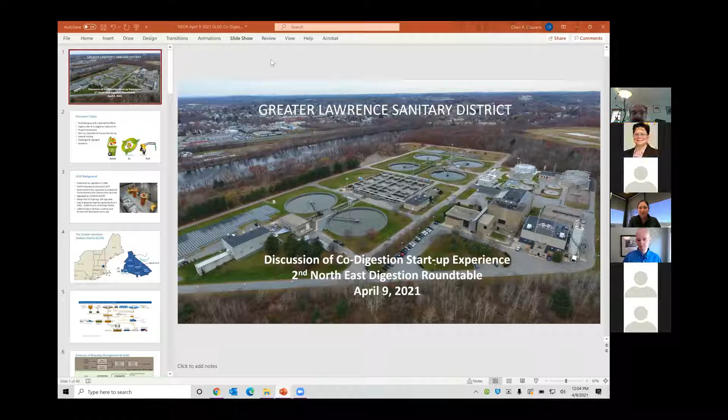All right, Janine, thank you so much for the introduction. I also want to let everyone know that Ben Mosier, who was integral with this Organics to Energy Project, is also with us today. He's the VP and manager of the Northeast group for CDM Smith. So Ben, thank you for being here today as well.

This is just an aerial shot of the Greater Lawrence Sanitary District, which I think is a pretty plant. I don't know if everyone else thinks that, but.

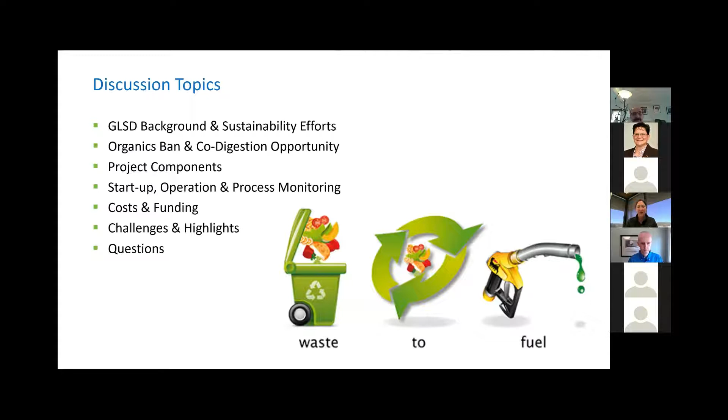So today I'd like to discuss a few items with everyone, including just the background on GLSD so you can get a feel for the type of plant that we have. And then I'll get into the organics ban and why we actually embarked on a co-digestion project, which we call Organics to Energy. We'll go over the components of the project, some startup data, what we're monitoring for different lab tests, the costs and funding, and then just highlight some of the challenges and benefits of the project, and then open it up for some Q&A.

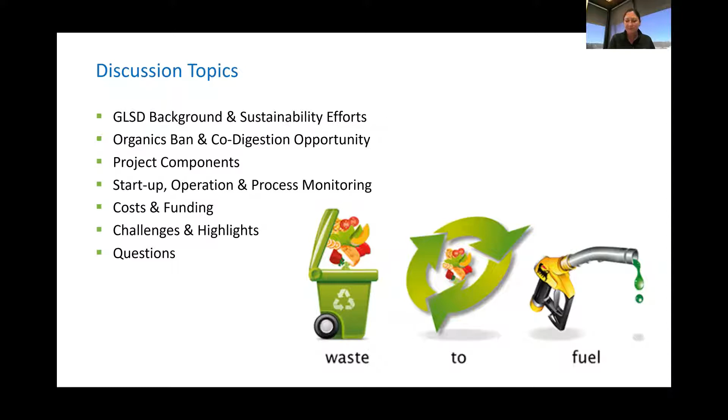So a little background about GLSD, and the picture on the right is our pumping station, which is about a half mile from the main plant. And I always find this interesting to show off: we have two 1250 horsepower motors and two 800. This is a little bit of a dated photo, we've added eddy current clutches to the two smaller pumps, but we have some really big pumps that bring the flow to our main treatment plant in North Andover.

We were formed by legislation through the state in 1968. We've been operational since 1977. And just as other districts are governed, we have a board of commissioners that represent the communities we serve, and depending on the population of the community, they have 1 up to 4 commissioners at this time, but for every 20,000 additional population, they have another representative on the board.

We are regulated by the federal and state government, just as every other treatment plant is. As Janine mentioned, we're a 52 MGD plant, and our peak wet weather flow capacity is a little over 135 now, but we're leaving it at that for now.

And one other item that makes us special, I guess you could say, similar to what Deer Island does, is we have an on-site heat drying facility that was built in 2002 in conjunction with our digestion facility, and we produce a little over 5,000 tons per year of a fertilizer pellet. John Kopek from Synagro is also on the line, so I'm glad to have you here too. 100% of our pellets are considered Class A, exceptional quality, and sold to local farmers and landscapers.

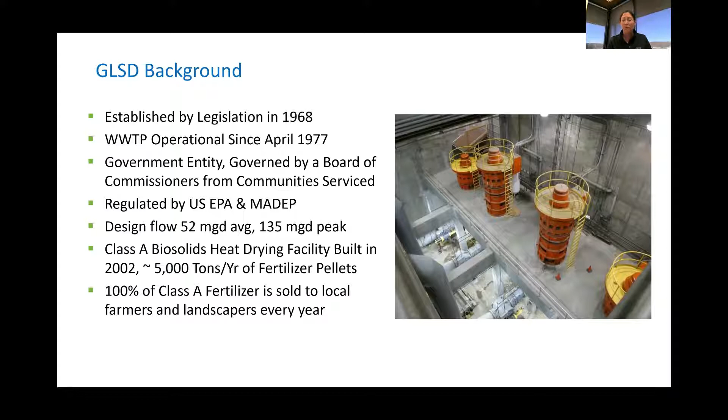So just to show you where we are, in case people aren't familiar, we're located in North Andover, as the star indicates, and we service the cities of Lawrence and Methuen, as well as the towns of North Andover, where we are, Andover, the eastern part of Dracut—the western part goes to the Lowell plant—and all of Salem, New Hampshire.

And you can see the Merrimack River goes right through our service area, and that's where we discharge our final effluent. So here's a fairly new process flow diagram that was put together.

We're a typical treatment plant in many ways. Like I mentioned, we have our off-site pumping station. We're a little bit backwards in a way, but it seems to work—we actually do grit removal before screenings. Then we have circular primary clarifiers.

We've had many iterations of different methodologies here, but as it stands right now we have an anoxic selector, fine bubble aeration, final clarifiers, disinfection and dechlorination with sodium hypochlorite and sodium bisulfite.

The solids off of the primary clarifier, as well as the waste activated sludges and the food waste, all go to different thickening processes, except for the food waste actually—the food waste goes in directly to the blend tank, to the digesters.

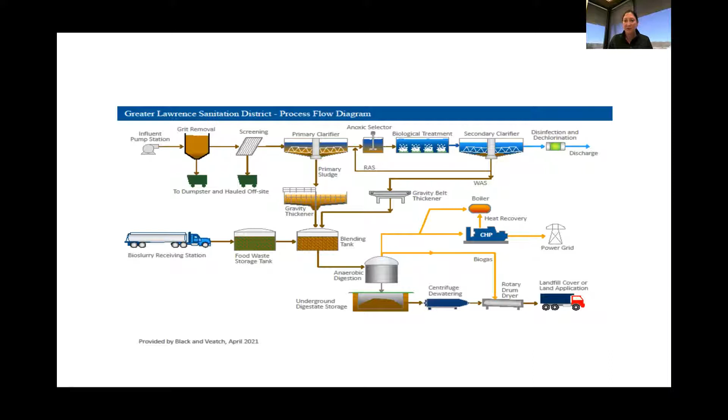I just wanted to touch on this for a second because we've had an evolution here with how GLSD handles biosolids, and I thought it was worth mentioning. So when we went online in '77, we took the waste activated sludge and primary sludge, thickened it, and went right to the incinerator on site. That was very convenient, I guess you could say. That didn't last for too long.

Then we took the mix of waste activated sludge and primary sludges, went through gravity thickening still. And at that point we would decide: do we want to just go with liquid offsite disposal, or go through the belt filter press and produce a cake? Again, this is all landfill.

It was during this time that GLSD realized this is not a sustainable model. We had trouble finding landfills that would accept the amount of biosolids we were producing, and the costs were extremely volatile.

And that was the impetus for GLSD to embark on the Anaerobic Digestion project, which went online in the early 2000s. That's, like I mentioned, the heat drying facility and the anaerobic digestion facility went online around a similar timeframe.

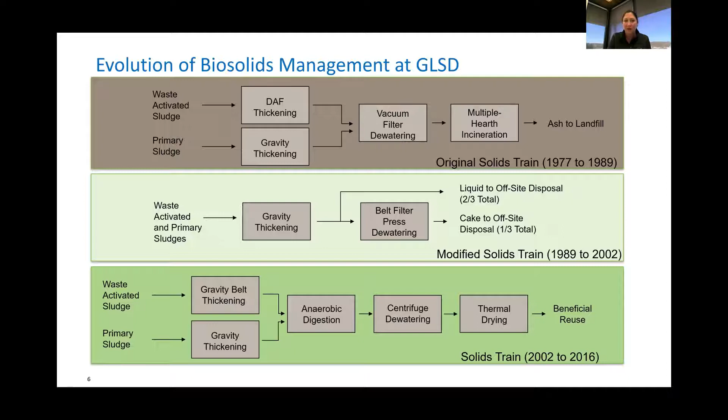So from 2002 to 2016, before the Organics to Energy project went online, we were taking the waste and the primary, again thickening it, sending that combination into the anaerobic digestion process, through the centrifuge, through thermal drying, and then beneficial reuse. So just worth noting, we've really been through a lot with our biosolids management, continuously trying to become more efficient with it.

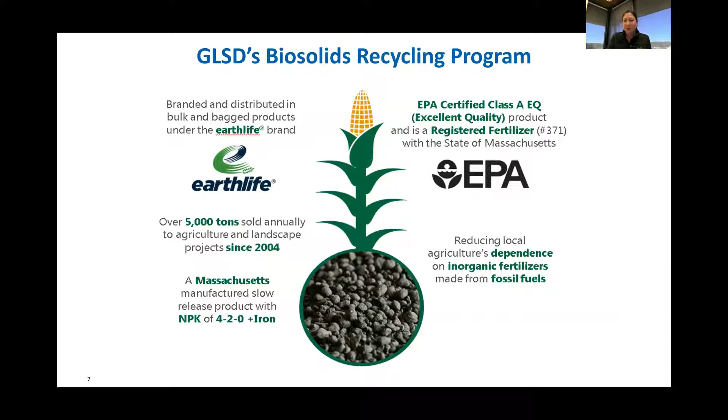So as I mentioned, we make this fertilizer product. It's branded under the EarthLife brand—exceptional quality, over 5,000 tons per year. It's a way of reducing the amount of commercial fertilizers that need to be used, along with many other things that I can mention further on in the presentation.

So just to give everybody an idea of how this all happened, I started as I took the director position in January 2014. And one of the first reports that I came across was this—actually, no, I'm getting ahead of myself. Let me talk about the ban first.

Massachusetts moved forward with an organics ban that became effective in 2014. Most of you probably are aware that the state is planning on going from producing 1 ton of food waste per week down to a half a ton—I believe this October, if they're on track. So anyone producing that amount of food waste or more can no longer dispose of it at an incinerator or landfill. It needs to be diverted, recycled through composting, or sent to an anaerobic digester. This is impacting larger facilities like hotels, restaurants, and supermarkets.

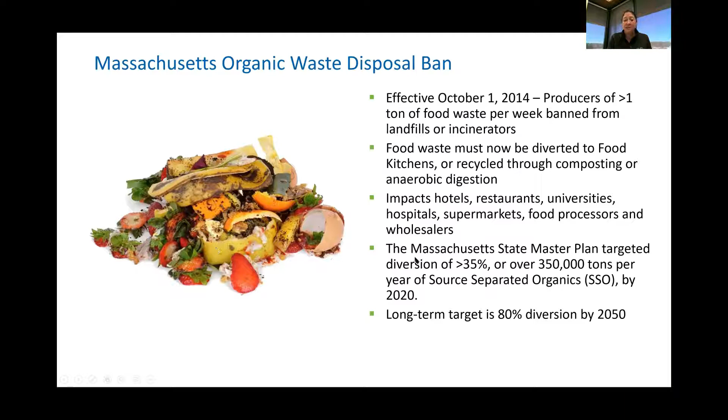And the state's long-term target is 80% diversion. I like to show folks this because, and probably most of you have seen this before, but I was intrigued when I saw this, because although composting is an excellent way of recycling food waste, EPA did put industrial uses ahead of it.

One of the items was fuel conversion and food scraps for digestion to recover energy, so I was really intrigued with that. Basically, anaerobic digestion is looked at as a twofer: we're able to recycle the food waste and also get the energy from it.

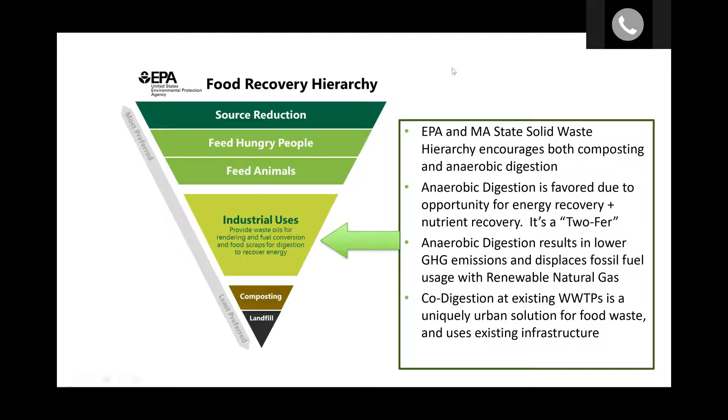This might be a little bit outdated, I can't be 100% sure, but it would be close if it's not exactly right. In Massachusetts, out of 118 treatment facilities, 6 have digestion capabilities. The other one that's larger than GLSD is Deer Island. This is good to know, because all of these things came into play should GLSD actually move forward with a co-digestion project or not.

As I previously mentioned, I started here in 2014. One of the first reports I saw was this co-digestion feasibility study produced by CDM Smith and funded by the Clean Energy Center. The outcome of this report stated that with Greater Lawrence's existing digestion facility, meaning the 3 digesters we currently have, we could actually take in around 30,000 gallons a day of source separated organic material. If we wanted to add a 4th digester, we could take around 90,000 gallons per day.

What was really intriguing to me was that if we added a 4th digester, we had the potential to make all of our power needs, all of our electrical needs, and that would eliminate almost a $3 million electrical bill per year. Another important thing to note is that at the time, GLSD had, and still does have, 2 distinct power feeds into the plant, but we did not have full backup power via a generator. So this project could also help with that situation as well.

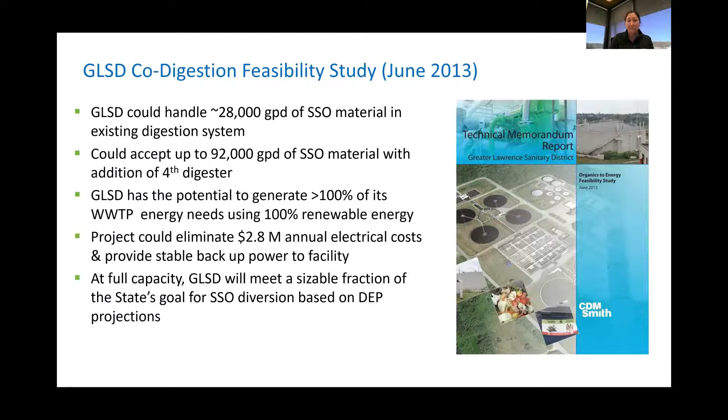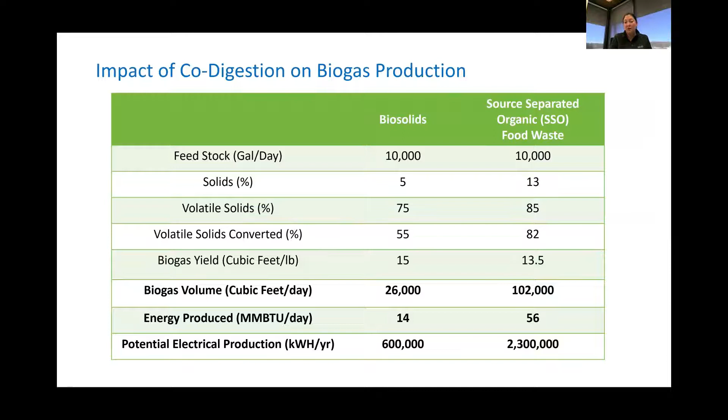Another huge incentive with moving forward on a project such as this is the biogas production, and you're going to see for the same amount of gallons, 4 times the gas production. That's very important if you want to make a project like this financially feasible.

This is a little bit redundant, but just another nice little process diagram of what co-digestion actually is, and I think most people on this call are probably very familiar with it. But GLSD already had the digestion complex, thickening capabilities, pelletizing capabilities, our wastewater treatment facility, and producing a final effluent.

But here, now we're going to add two other divisions, I guess you could say, where we're going to take in organic waste, and we need to make sure it's pre-processed and has minimal contaminants, and also utilize the biogas in a different way.

This is actually probably a good time to mention that for the last 10 or so years, before the Organics to Energy project came online, we were utilizing the biogas from the 3 digesters. We were sending that over to the heat drying facility, and that was the fuel source for providing the heat to dry the pellets. We were also using it to heat the digesters and for furnaces on site. But obviously, taking on more biogas and using it to produce energy, there was going to be a lot more that you would have to bring online to be able to use the biogas in that manner.

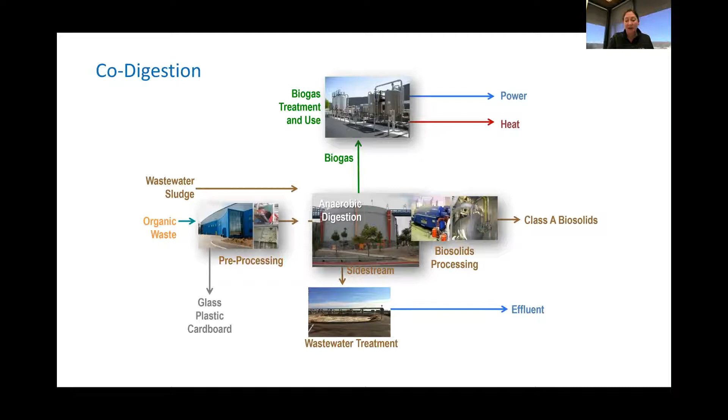So here's a nice photo of some existing and some new infrastructure that we've brought online, and I'll get into more details about each item in the subsequent slides. You can see the 4 anaerobic digesters, the digestion facility where B is labeled, and a tall, thin flare which is our existing flare, and the shorter one, which I was really surprised to see, but it's a totally different design - a newer flare that actually has a higher capacity. Both are from Varec. K and J are the vessels to reduce the H2S and siloxanes, and D is the radiators and chillers for the engines.

On the CHP building, which is H, on the top of the roof you can see the large units. Those are actually HVAC units to keep this building cool, especially in the summer. Another interesting thing about this project is that the stacks are actually quite small.

You can see the letter I is right over one of the stacks, and then there's a second one off to the left. E and F are where the offloading stations are for the food waste acceptance, and we have underground tanks for those. I'll get into more detail.

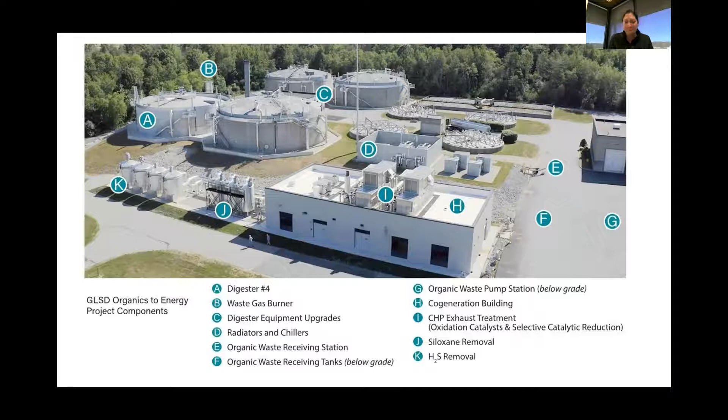So we have two distinct truck offloading stations, and currently we use one at a time, but we do have the capability of using both.

The receiving tanks - there's a picture before we put the cover over the underground tanks. We were actually able to place those adjacent to one of our underground tunnels. In the next picture over to the right, you can see the tunnel, and it was wide enough that we were able to add not only the mixing pumps, but the transfer pumps for the food waste.

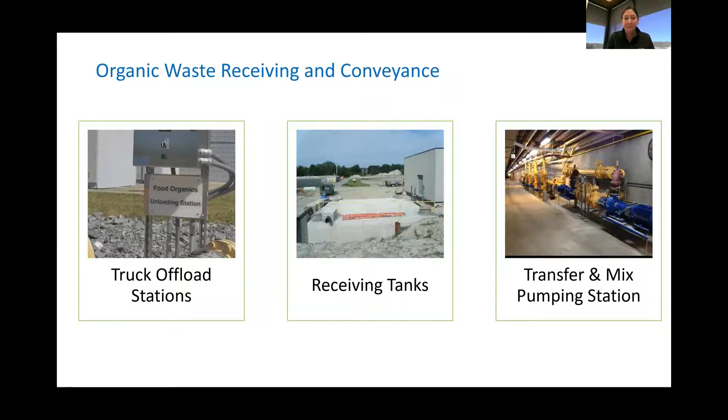Just a little more detail about the digesters. The 4th digester we put in is almost a replicate of the original 3 - same volume, utilizes draft tube mixers, steel gas cover.

It was determined through engineering analysis that we did not need to add a separate gas holding tank, that there was enough capacity underneath the covers that we could store enough, especially where we were planning to basically burn the gas as it was being produced, that we wouldn't need a lot of storage in addition to the floating covers.

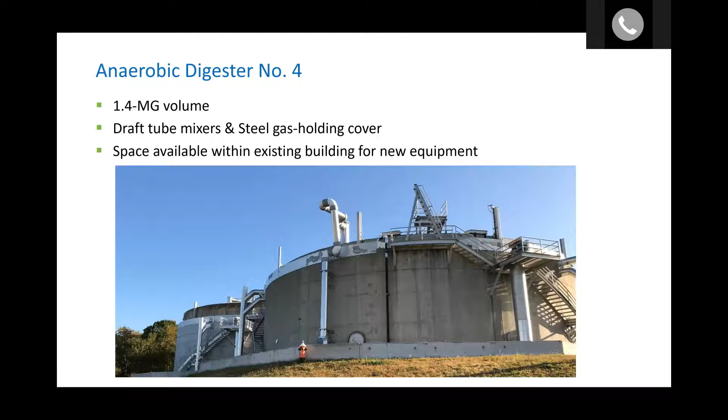Another item to note, CDM Smith did a really nice job when they designed the digestion complex originally in the late 90s, early 2000s, because they left space for the pumps and for the heat exchanger in case we wanted to add a 4th digester. So there was definitely some forward thinking there, and it was extremely helpful when we moved forward with expanding that digestion system.

The biogas conveyance and treatment system is state of the art. I don't think there's another facility in Massachusetts that's treating the biogas to the extent that we are. We have fixed media to reduce the H2S, and we're currently using a carbon type media for that, and we have 4 vessels. We also have a different type of carbon media for siloxane treatment. The process has been working excellent to produce a very clean gas before it goes to our engines.

We also have expanded gas conveyance capacity. The original 3 digesters needed some modifications so they could overall move more gas, because we were expecting to produce more gas once you start adding food waste. That's been very helpful and has worked very well.

And as I mentioned, we added a new flare per Mass DEP. Even though we had an existing flare, it wasn't the case that you just need to add another little flare so that between the two it can handle the new maximum capacity. They wanted the new flare to be able to handle the entire maximum capacity of the new program, and so we did go ahead and do that.

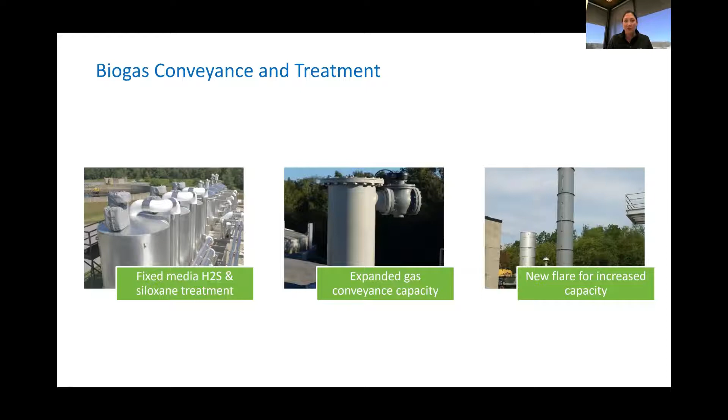Here's a beautiful picture, at least I think it is, of one of our 2 Caterpillar engines. Each one is capable of producing 1.6 megawatts of power. We do have space for a 3rd engine if we want to go that route down the road.

The regular mode of operation is that these generators are producing our base load here at the treatment plant, and whatever we have as extra is net metered onto the grid. We weren't able to send the power directly to our offsite pumping station because there are parcels in between our lot and the pumping station's lot, and the electrical utility would not allow that. So we found a way to be able to use this additional power, and what they let us do is net meter, and administratively we get credited kilowatt for kilowatt on that bill, which is very helpful financially.

So at the plant, our typical usage is about 1,700 kilowatts, and at Riverside it's about 1/3 of the overall, 700 kilowatts, which at this point we're taking care of all of our plant needs and a portion of Riverside, but we're hoping as we come out of the COVID situation and more restaurants, colleges, universities and other institutions open up, that there'll be more food waste moving forward.

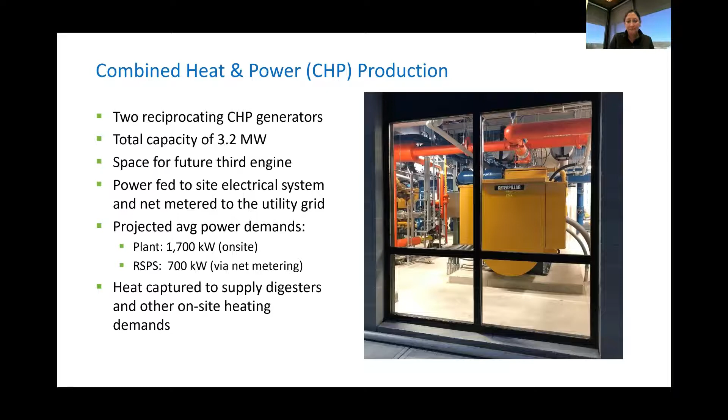I already touched on this a little bit, but I'm really proud of this. We have the best available control technology for the exhaust coming from both combined heat and power engines. I did not mention their Caterpillar 3520Cs, and they actually are set up to run on biogas, but can also run on natural gas. So that's another nice feature of those. We have 2 different technologies to clean the exhaust before it's emitted to the atmosphere.

We have oxidation catalyst to remove VOC and carbon monoxide, and then we have selective catalytic reduction to remove NOx. That system also requires a urea injection ahead of the SCR for NOx removal. So it's an expensive system, quite a bit of O&M involved with it, but we're really proud that overall it's an environmental benefit to have this system in place.

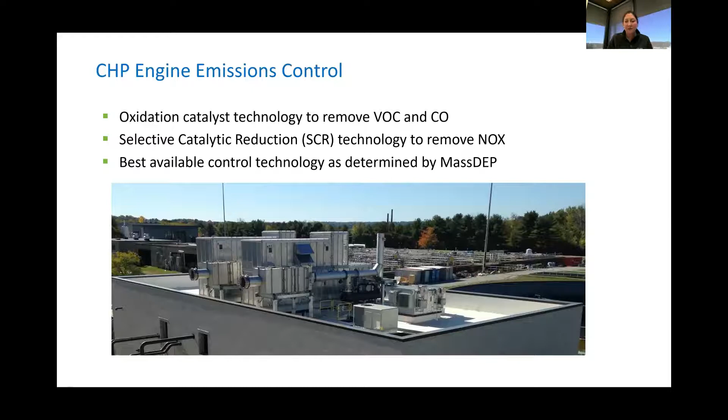Just going to fast forward a little bit. One thing I should point out to everybody is when we decided to embark on this project, we planned on doing a pilot program and then a full scale. As we were investigating sources of grants and loans and other ways to help fund this project, we realized that one of the biggest grant agencies at the time, Department of Energy Resources, had an incredible program in place. It was a resiliency program, and they were allowing up to $5 million grants.

The problem was they wanted this work done in a fairly short period of time. So when we initially asked for grant monies, they said, we can fund part of this, but we can't fund the whole thing because it's just going on too long. You can't do pilot. And then, they didn't come out and say it, but we basically were forced to condense the project and simultaneously do a pilot program and the full scale construction. And that's what we ended up doing.

So we started with a pilot program in 2017, and we had a small pump in place at the time. We were using an existing mixed tank. We were taking in small amounts of food waste from waste management and slowly ramping it up until the full scale was available. And it was a chance for us to fine tune what works, what doesn't work, determine the impacts on our existing digestion process.

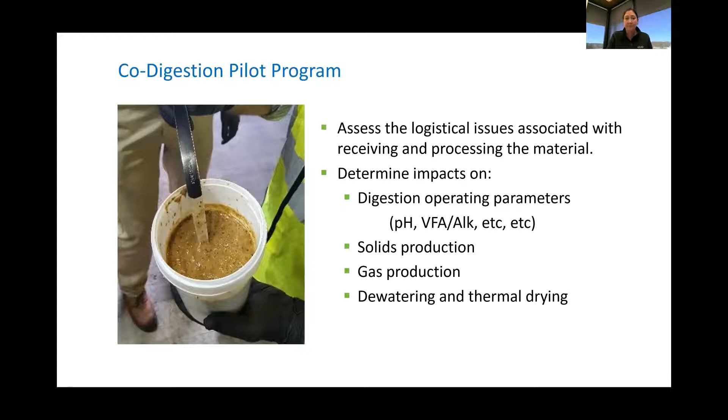One of the key ingredients for a co-digestion project is a source of food waste, which we call engineered bioslurry. So GLSD embarked on a request for proposal process. We did get 3 different proposals. We evaluated all 3 and selected Waste Management. They in turn built a facility in Charlestown, Massachusetts, which they call CORE.

And they take in the SSO material from all of the institutions we mentioned before and clean it, remove contamination, slurry it. They use complementary liquids to reduce the amount of water that needs to be added, and they produce this EBS product, which we've been very, very happy with.

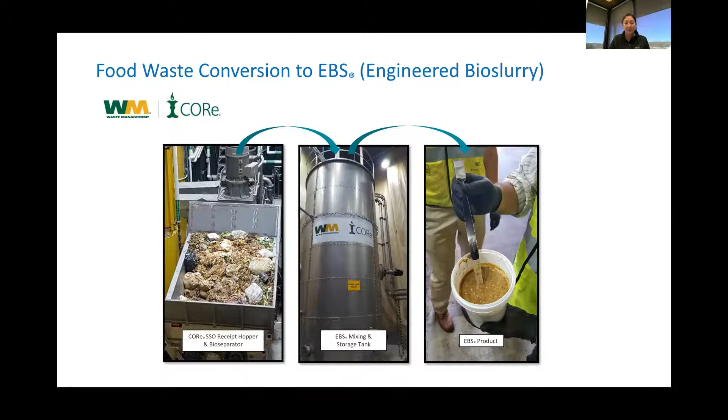So there's one of the tanker trucks when we first started getting food waste, and they truck the material from Charlestown up to North Andover, and they offload and go back and grab another load for us and come back. So it's really working out very nicely.

The pH of this engineered bioslurry is actually lower than I initially thought it would be. It's, let's say in the 4 range. TSS in the 9s, total solids can be 14, maybe a little higher. Volatile solids are very high, which is why you make a tremendous amount of biogas from this material. Volatile solid to total solids, 85% or better. And a typical COD is about 270,000. So it's very high COD, very high volatile solids.

It's higher than typical solids of a municipal biosolid. So it is a different type of material to handle than municipal biosolids. Not that it's a bad thing, just we need very particular type of flow metering devices. A flow meter that works on municipal biosolids will not necessarily work well for measuring food. So, we learned a few lessons with that, but we did figure it out.

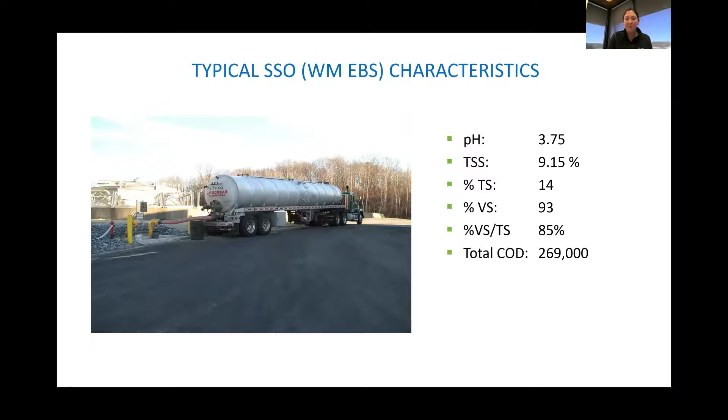Just a few numbers regarding our co-digestion, our performance before co-digestion. We're sending between 160 and 170,000 gallons per day of municipal biosolids to the digestion complex, about 4% solids, 2% in the digestate. Volatile solids reduction was about 64%. Around 50% for overall solids reduction. Our detention time was a little over 18 days, and our biogas production before co-digestion.

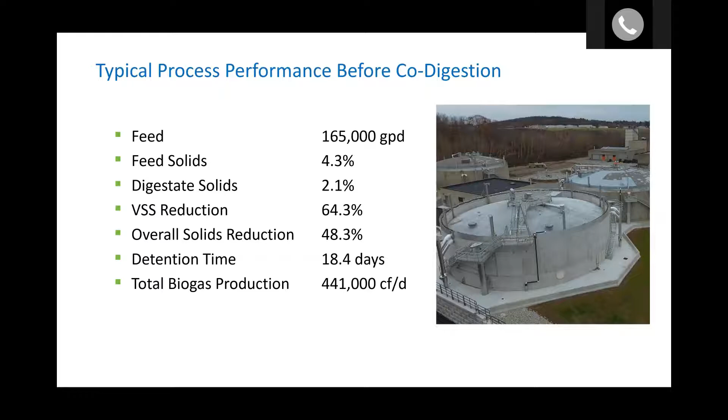That was a number when we averaged some data, but I would say between 300 and 450,000 cubic feet per day.

So for folks that like graphs, and I'm sure we have a few on the line that do, I'm going to make you happy for the next few slides.

This is showing the startup of SSO feed starting in February 2017 through the end of 18. This was startup, but you can see how it slowly ramped up over time until we got to full scale.

What's important to note here is our volatile solids, pounds of volatile solids per cubic foot per day, before co-digestion was 0.12, and during the pilot we were at 0.19. So we were really loading these digesters quite a bit more than typical, but they were doing really well.

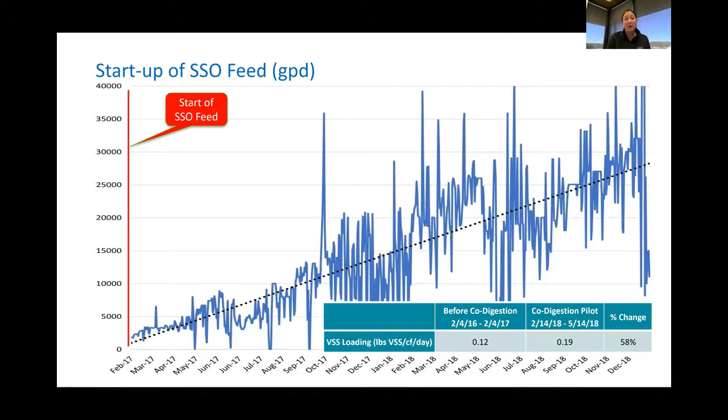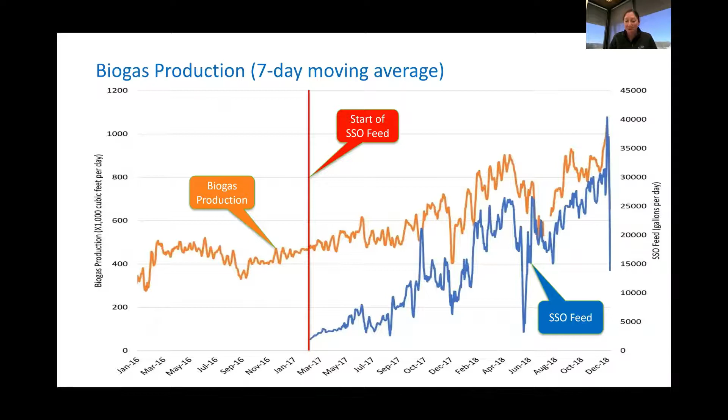Biogas production, this is a 7-day moving average. So we're showing a span of time before we started taking the SSO, which was February of 2017. You can see that as soon as we started taking in the SSO, the gas production went up, and it sort of mirrors each other. Someone's probably going to ask me what that big spike is around June of 18. I cannot exactly explain that, other than there must have been some type of metering error, which happens sometimes with these flow meters.

When you embark on this type of project, you're going to keep a very close eye on how your digesters are doing with the addition of the food product. We found very stable pH throughout our pilot program and to present as well, in healthy ranges between 6.8 and 7.8.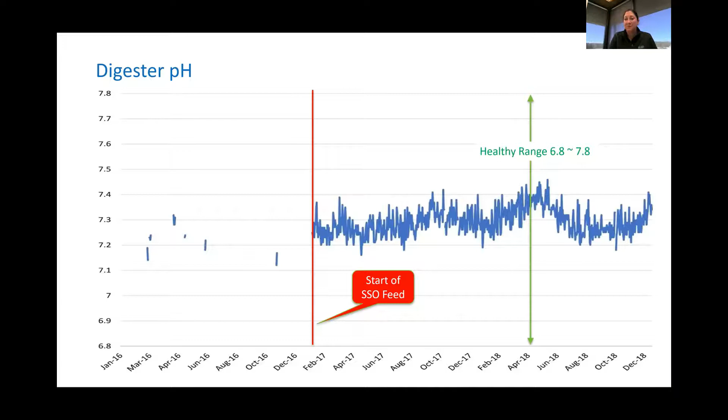The volatile acid to alkalinity ratio stayed fairly consistent. It was below the 0.35, which seems to be the number you want to stay below. We felt very comfortable with the numbers that we were seeing, and we continue to see.

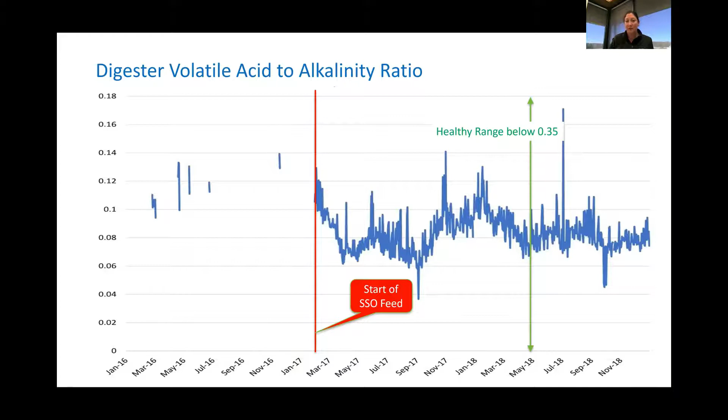This is an interesting slide for food waste addition and biogas production, for 2020. Again, you can see it basically just mirrors each other, and that's basically what you would expect. What would be important to note here is, actually, we dipped a little bit there, but we're back into the 900 to a million cubic feet per day now.

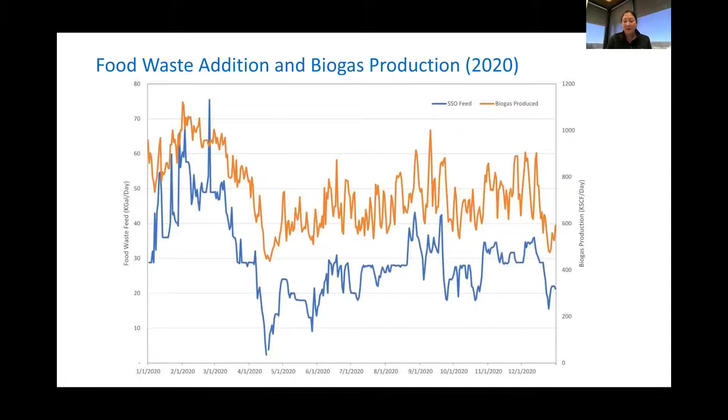This is just another slide for electrical production and export. The orange is showing how much we're exporting onto the grid, which is used for the bill at the pumping station. The blue line is our electrical output from the generators on site. The gray is what we're actually using on site.

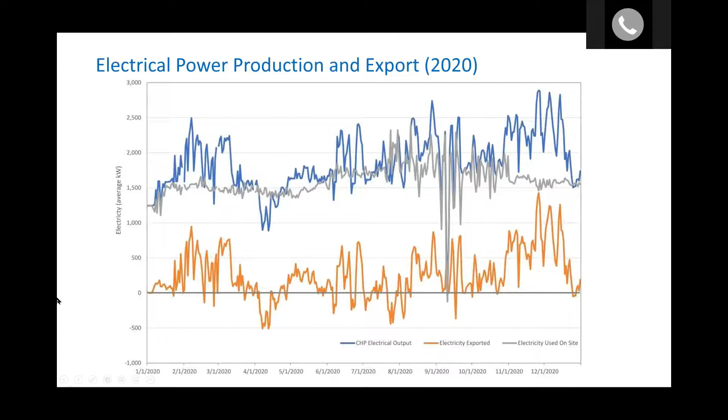This is a really nice slide that really breaks down the power, heat recovery, and biogas for this new facility. When we looked at the data, we found that we were producing about 1,900 kilowatts of power on average, and that is contingent on how much biogas we're making. So the more biogas we make, we can run one or both engines, at 50% or higher. These engines want to run at higher percentages, closer to 100%, the better.

We're using about 1,500 kilowatts on site, and the additional 400 is sent to the grid for the pumping station. On a typical day, we're using about 65% of the biogas within the CHP process in the engines. About 25% is going to the pelletizing plant, and about 10% is going to boilers for heating and hot water. On a typical day, we are not flaring any biogas, and the heat recovery is about 4 MMBTU per hour.

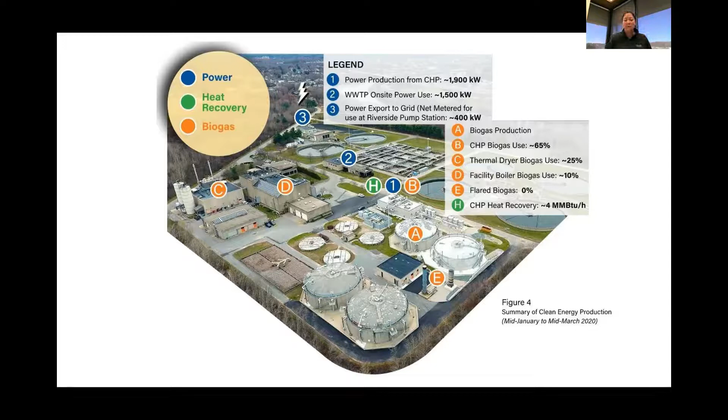I'm sure folks are interested in finding out, well, how much did this project cost? There seems to be a lot of components and a lot of big pieces. The overall cost was about 28 million, which is a large number, but this project didn't just include items necessary for co-digestion, but also included major upgrades to our electrical systems coming into the plant, transformers, switch gear. We basically replaced all of the original switch gear from the 70s, so it was an improvement that had to be done whether or not we moved forward with this co-digestion, and it was done simultaneously.

Where we really did well was grants and incentives. The Mass Clean Energy Center, who had originally funded the feasibility study, also helped us fund this project - they provided $400,000. DEP provided $500,000. Mass Department of Energy Resources provided $5 million. National Grid's CHP incentive program was $2.34 million. And principal forgiveness through the Clean Water Trust was almost $1.6 million.

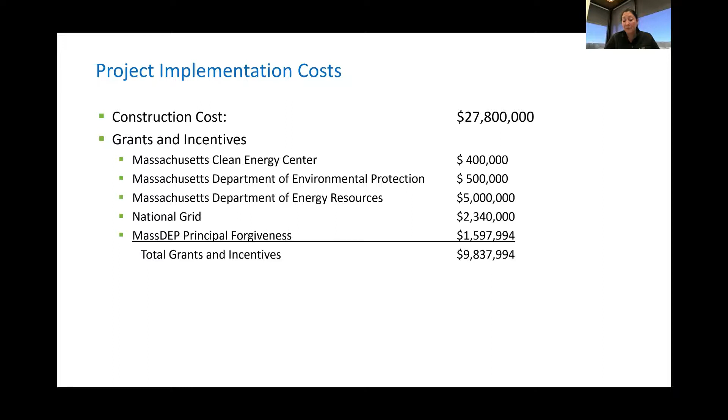Because we do serve environmental justice communities, all in all, almost 10 million in grants was taken off the total price, which was really fabulous.

Just a little more information on the financial aspects, because this is not a typical wastewater treatment plant project. It wasn't mandated by a new NPDES permit, or needed like the new switch gear I mentioned. This was something we really wanted to take on to partner with the Commonwealth and have an outlet for the food waste, and also to provide major resiliency improvements for the district.

So looking at the finances on the revenue side: tipping fees for acceptance of the food material, also eligibility for alternative energy credits, renewable energy credits, and also clean peak credits, which is a newer credit that I believe first became available in 2020. Projects had to come online after 2019.

Also avoided costs, a reduction in electrical needs from the grid, and this was also a way of tempering volatile increases in electrical costs. I mentioned the grants and incentives we received, thank you to all of those agencies. Also costs, which are part of the project as well. We did have to take a loan for the balance of what the grantors did not provide.

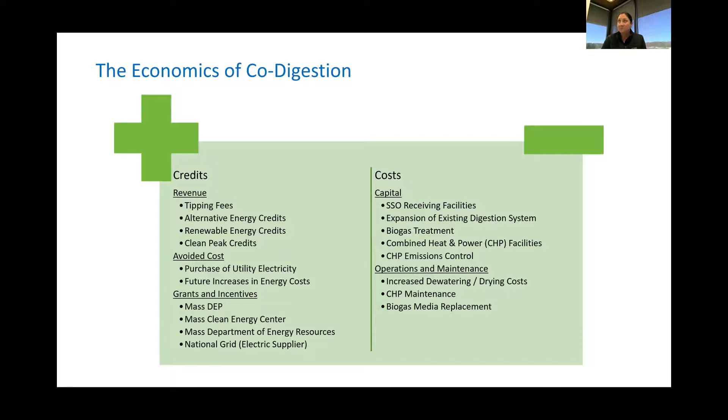Also ongoing CHP maintenance, not just for the engines themselves, but the gas treatment and the exhaust treatment. I would say heavy O&M with those items to make sure everything's running well.

Related, but a little bit unrelated — I thought this group might be interested in this. EPA did a study of the GLSD Co-Digestion project and how it compares to other ways of recycling food waste. I was really surprised, I thought it would be better, but I didn't realize it would be this much better, how much better anaerobic digestion is compared to composting and landfilling, and actually waste to energy did show a slight positive improvement for global warming potential.

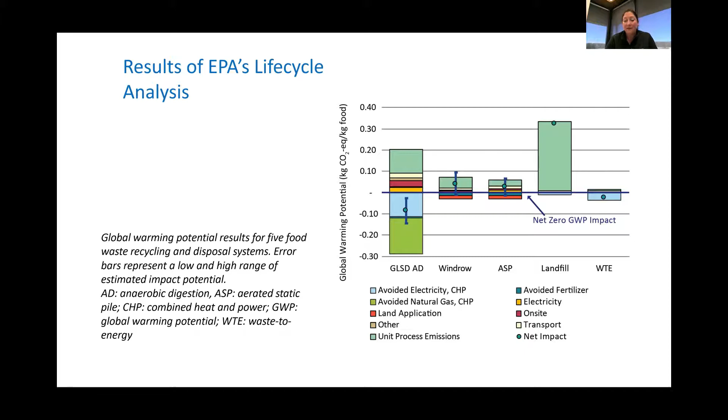They broke it down even further, and 6 out of 8 categories, believe it or not, GLSD anaerobic digestion was the best performing. The 2 where we were not the best performer were water usage and eutrophication.

When they were writing this report, I did question the eutrophication finding, because they really thought, since we're taking in so much organic material, that we'd have a lot more phosphorus in side streams and end up discharging more phosphorus. And we're just not seeing that. We're not seeing that at all.

Also for water use, once that was brought to light that this was considered the worst performer for water use, we've made a concerted effort to reduce the amount of water that's being trucked from Charlestown up to GLSD. We're trying to send up a thicker product and do some dilution here on site, and that's helping with a reduction in trucking traffic. So we're doing our best to try to bring that bar down.

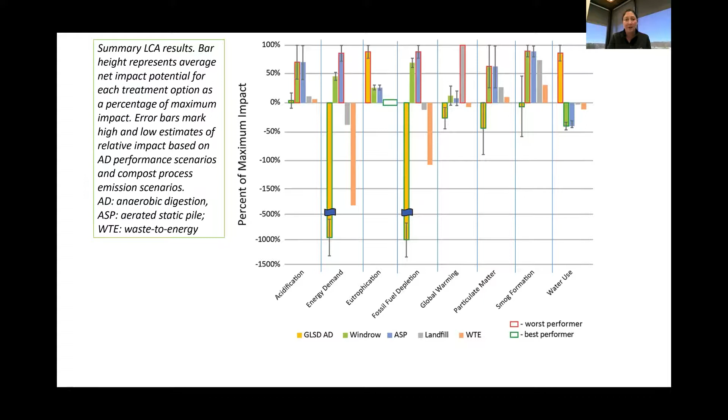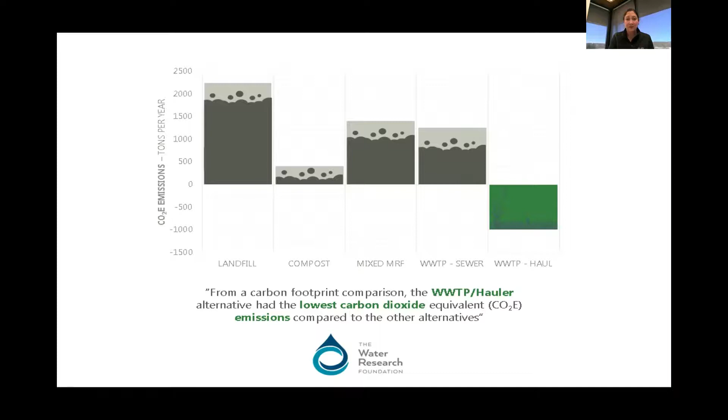I want to touch upon the challenges of this project, because there were many. As I mentioned before, trying to finance what I call an atypical wastewater project, one that's not pushed by an NPDES permit or required because something is failing or about to fail, was interesting. But we really ended up having some nice successes with that.

We also encountered an issue with the net metering cap, and had to talk to legislators to have them increase the cap so GLSD could net meter excess power to the grid.

We had ongoing conversations, and now have an amendment to a host agreement with North Andover that outlines truck routes, the amount of trucks, and the hours. North Andover was excellent to work with, and we have a really nice amendment in place, so there's agreement on how this moves forward.

Securing feedstock, as I mentioned before, we've had an excellent relationship with Waste Management. They provide a steady stream of the engineered bioslurry. We did see a dip because of COVID, but that wasn't the fault of Waste Management, and things have picked up quite a bit, and we're about back to pre-COVID levels now.

Permitting for this project was much more intense than I expected. We had looked at other facilities, for example up in Maine, that were doing CHP and some food waste acceptance, and we thought the permitting would be similar to what they went through, and it was not.

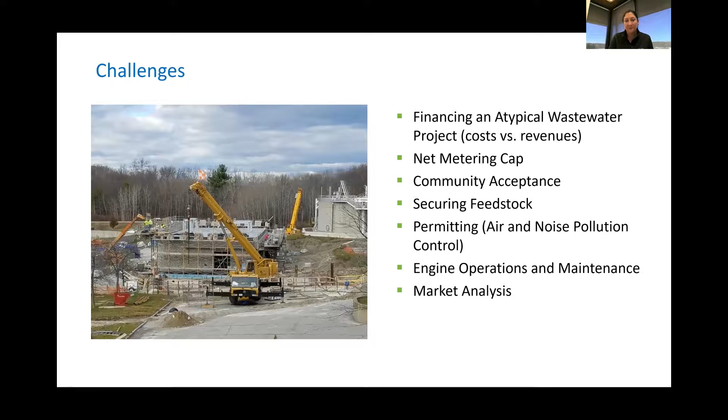Just to touch upon the environmental benefits a little more, we're using biogas, which is 100% renewable. The Department of Energy Resources provided data showing this is a 20% reduction in greenhouse gas emissions from our facility, which is like taking over 1,000 cars off the road.

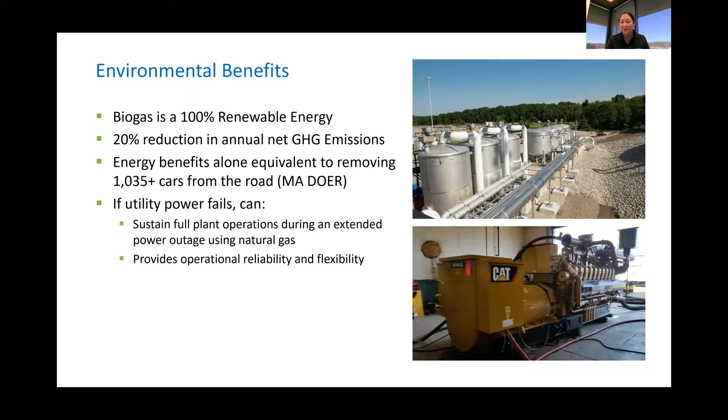Also, as I touched upon earlier, if we lose our power feed, we can actually black start these engines and power our whole plant completely disconnected from the grid, which is just amazing in my opinion. That's a picture of one of the CAT engines out in Indiana, I believe, when it was being tested before being shipped to the district.

A couple more project highlights: over 27 million invested in our new facility, almost 10 million in financial assistance. It's providing a net economic benefit to the district, especially environmental justice communities, advancing recycling of organics in Massachusetts to meet their goals. We're working to become a net zero or net positive electrical energy user, and I think we're getting pretty close.

We've had several other projects in the past to reduce our energy usage through other renewable energy sources, and I feel like this furthers GLSD's tradition of innovation and our goal of net zero operation.

So, really excited about this project. It's been online since December of 2019, working great, and happy to talk about it. Our project partners include CDM Smith, the designers, Methuen Construction, the contractor, Waste Management, who provides our food waste, and the funding agencies: DOER, Mass DEP, CEC, and National Grid.

And I guess I'll open it up for questions.

Thank you, Sherry. Yeah, that was, again, a great story.